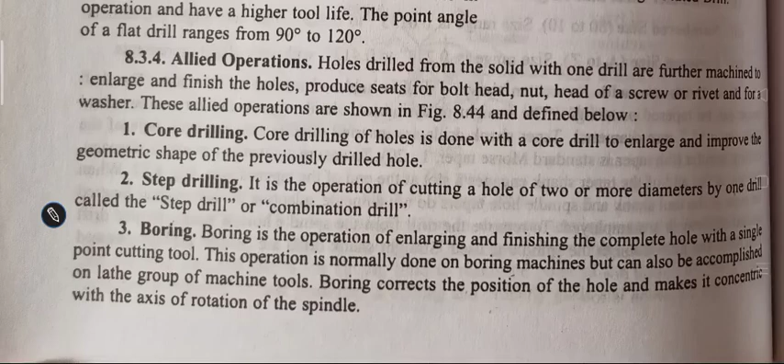Allied operations: holes drilled from the solid with one drill are further machined to enlarge and finish the hole, and produce seats for a bolt head, nut head, screw or rivet, or for a washer. These allied operations are as mentioned.

First operation, that is your core drilling. What is core drilling? In core drilling, holes are done with a core drill to enlarge and improve the geometric shape of the previously drilled hole.

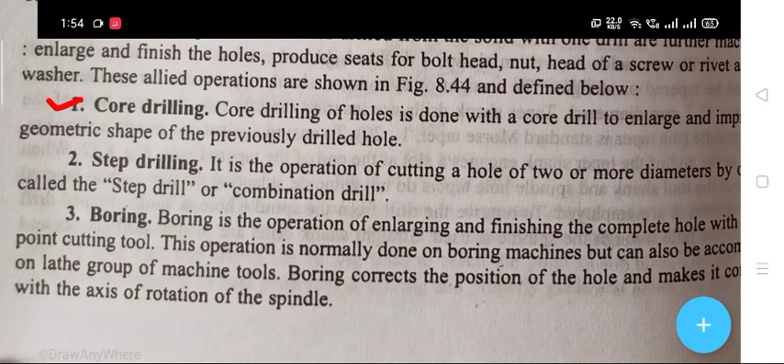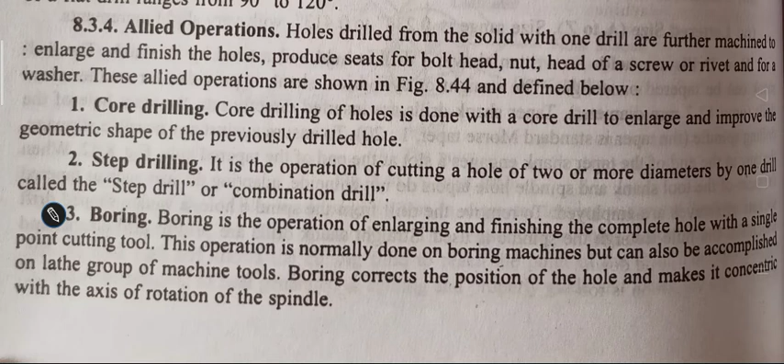There, core drilling of holes is done with a core drill to enlarge and improve the geometric shape of the previously drilled hole. The second one is step drilling, as the name indicates. Step drilling is the operation of cutting a hole of two or more diameters by one drill.

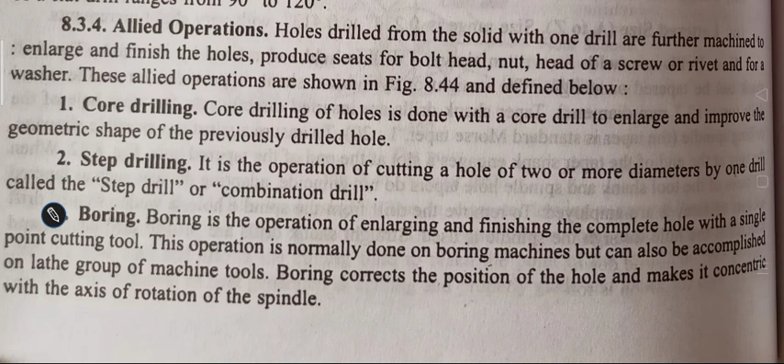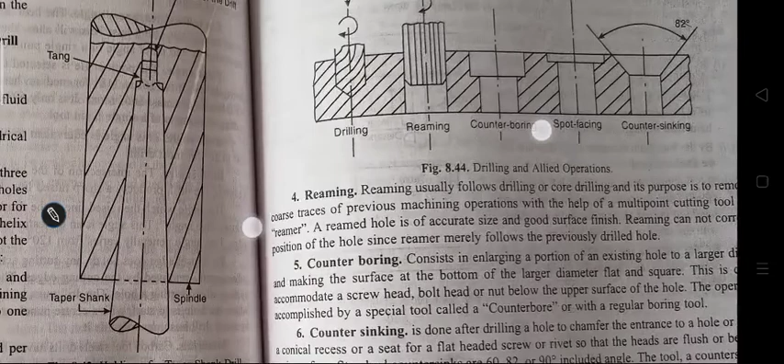This is the diagram for various operations: drilling, reaming, counter boring, spot facing, and countersinking. Another operation is reaming. Reaming usually follows drilling or core drilling, and its purpose is to remove all coarse traces of the previous machining operation with the help of a multi-point cutting tool called a reamer. So in reaming we use a multi-point cutting tool. A reamed hole is of accurate size and good surface finish.

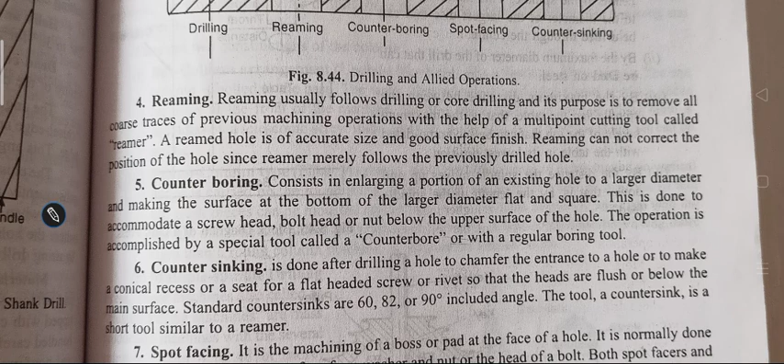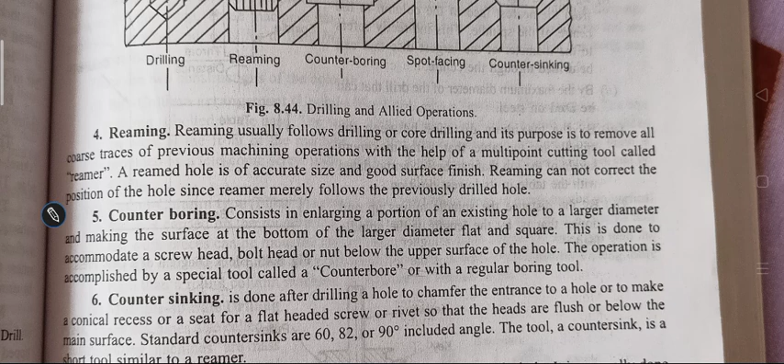In this diagram you have seen the reaming operation. Reaming usually follows drilling or core drilling, and its purpose is to remove all the coarse traces of the previous machining operation with the help of a multi-point cutting tool, the reamer. A reamed hole is of accurate size and good surface finish, and reaming cannot correct the position of the hole since the reamer merely follows the previously drilled hole.

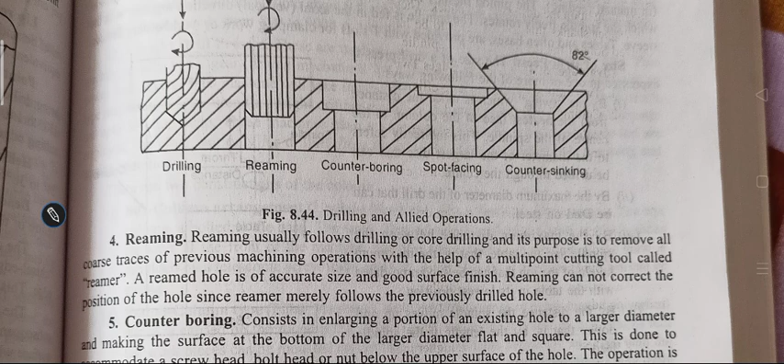Another operation shown in this diagram is counter boring, then countersinking, then spot facing. Counter boring consists of enlarging a portion of an existing hole to a larger diameter and making the surface at the bottom of the larger diameter flat and square. This is done to accommodate a screw head, bolt head, or nut below the upper surface of the hole. The operation is accomplished by a special tool called a counter bore.

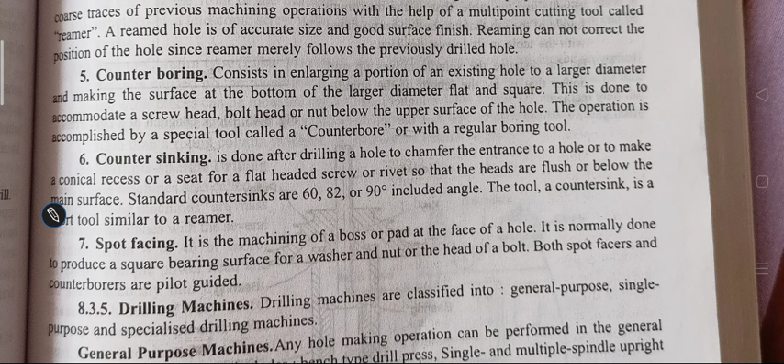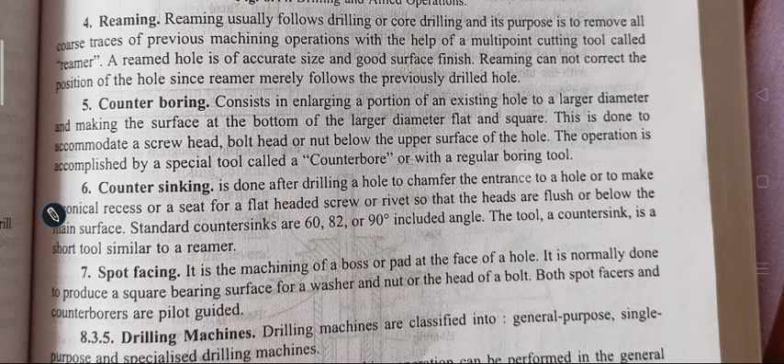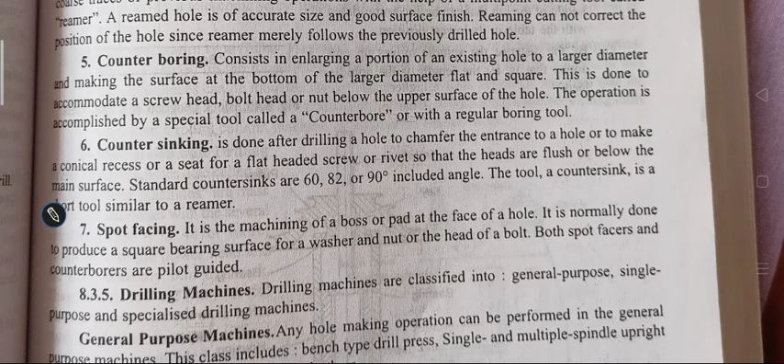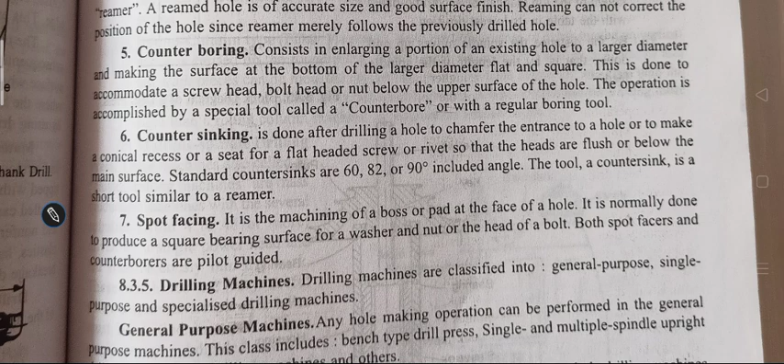Another is countersinking. This is the diagram for counter boring, and this is the diagram for countersinking. Countersinking is done after drilling a hole, to chamfer the entrance to a hole or to make a conical recess. This is the conical recess at 82 degrees, a seat for a flat-headed screw or rivet so that the heads are flush with or below the main surface. Standard countersinks are 60, 82 or 90 degree included angle, and the countersink tool is similar to a reamer.

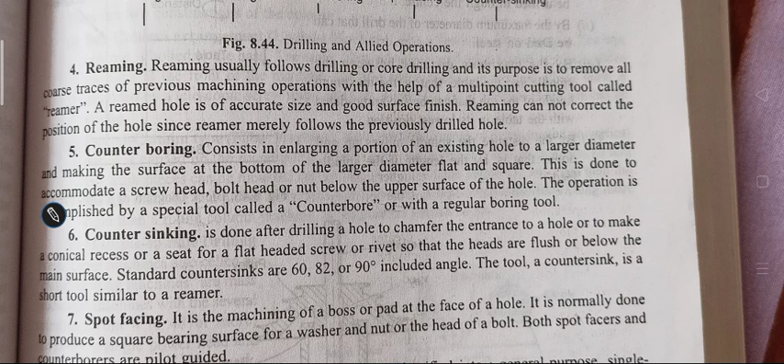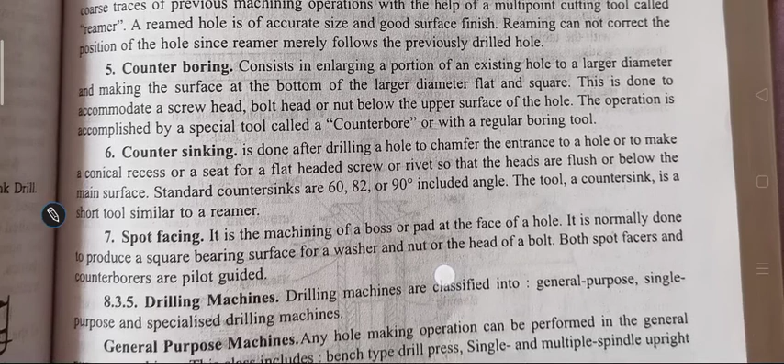Then there is spot facing in this diagram. Spot facing is the machining of a boss or pad at the face of a hole. It is normally done to produce a square bearing surface for a washer and nut or the head of a bolt. Both spot facers and counterborers are pilot guided.

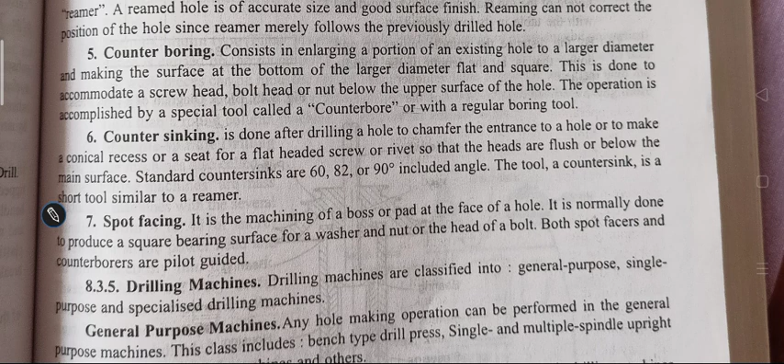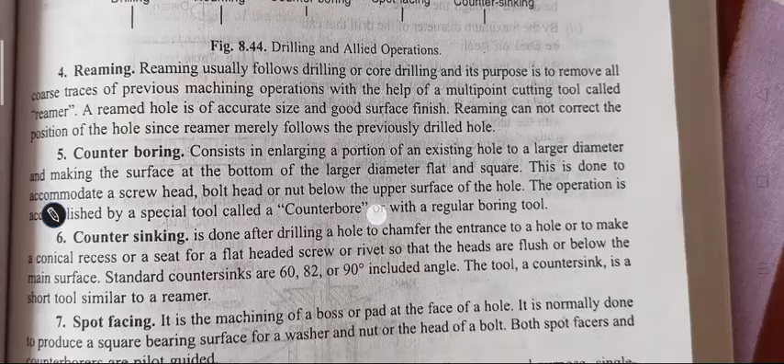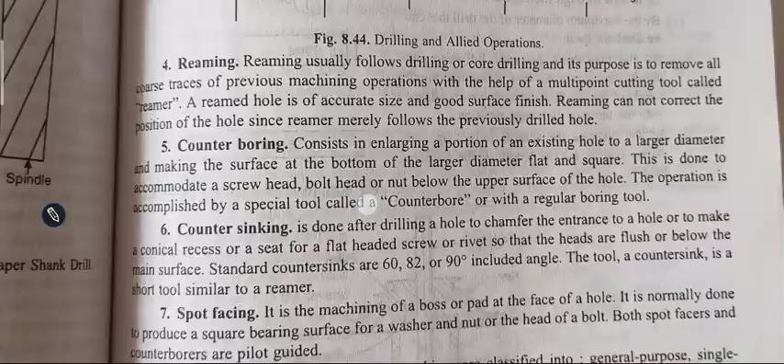This is the spot facing diagram, this is drilling, and these are reaming, counter boring, spot facing, and countersinking. These are the allied operations: core drilling, step drilling, boring, reaming, counter boring, countersinking, and spot facing. These are drilling and its allied operations.